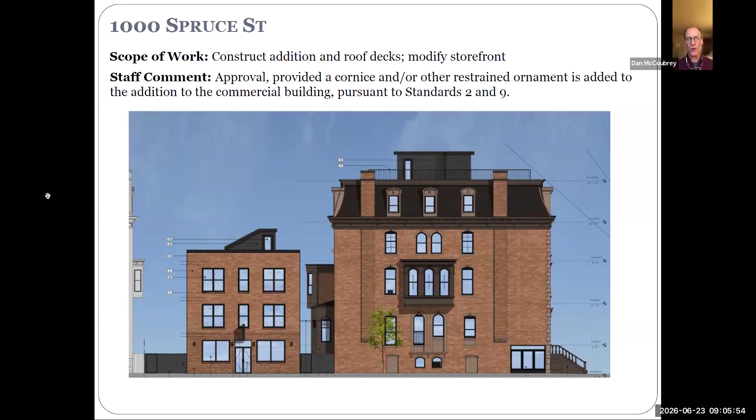So Rustin, I have two comments. The first regards the visibility of the pilot houses. You've shown us diagrams indicating it's presumably not visible from 10th or Spruce Street, but because it's a corner lot, there will be a diagonal view from catty corner from the house. We think it's possible that driving down—I can't remember if 10th Street goes up or down—from further up 10th Street, the pilot house on the existing building would be somewhat visible, the further you got away, of course.

So we've tried to make the railings as open and as minimal as possible. We've set the pilot houses into the center of the building—the configuration of the upper floors means that's really the only place they could go. So we tried to bury them on the property line, as far away from the corner as possible, while still having them function and work.

My other question is regarding the infills on this elevation at the lowest level windows. We see a kind of brown area there. So those are currently that way—they're currently infilled. Oh, I think you're talking about the two to the left, right?

Yeah, that one and the one opposite. And then there's also what looks like an infill of that arch head window—there's an air conditioning unit in that window at the moment. So essentially, we don't have a ground floor tenant yet.

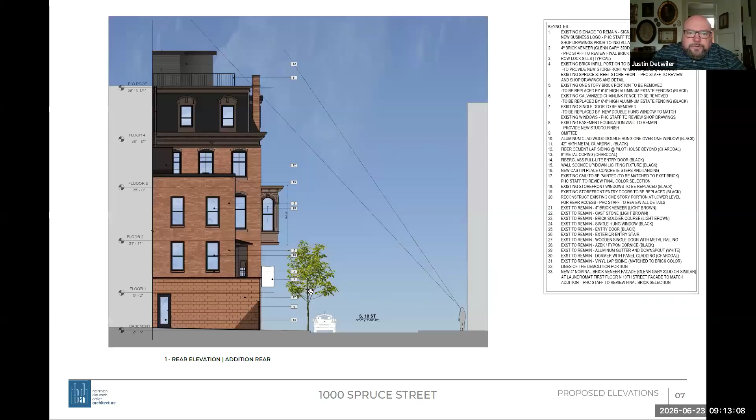Yeah. Rustin, how tall are they? The dimensions in the whole packet are kind of blurry, maybe from the shrinking of the PDF, so I wasn't able to really read the dimensions. We zoned them at 10 feet, but I think they're only drafted at 9 feet, which gives you 8-foot clear inside.

I just want to make sure they're as short as they can be. So it's an 8-foot ceiling inside. I mean, that's a 6'8" door that you're seeing there.

There's a very minimal curb around the top of this existing roof. In order to reduce the height further, instead of a roof deck, you would normally build it on an existing building, you would build a structure over the deck.

Right, instead what we've done is we've made sure that the roof is engineered in such a way that it's pedestal paver, so that's even lower. Even the paver system for the deck is concealed behind that existing low parapet, so that also helped shrink the height of it.

So we've done everything we thought that we could to try and tighten that up, but we can look at the setbacks of the railing further and eliminating that overhang and cornice up there.

Yeah, for me, it's the brown hatch, the perpendicular piece sticking forward towards east. If that could turn 90 degrees, I think it would be less visible. Yeah, we'll see what we can do.

This may be a situation where a little mock-up would be helpful, just to ascertain the visibility. These corners have such long views. Yeah, this is why we're struggling over this as much as we are.

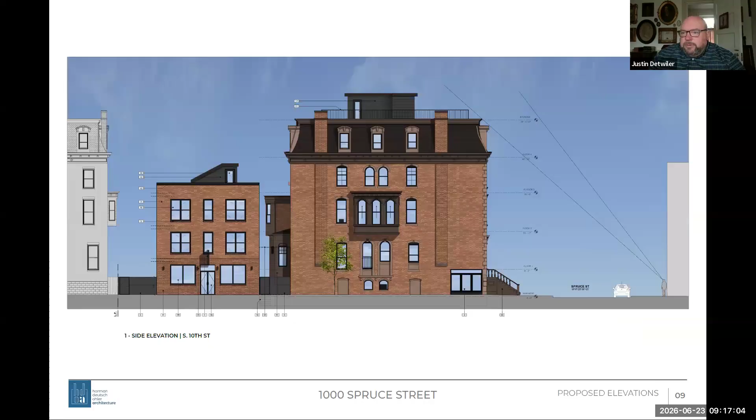Yeah, it's tough because you're working off of the existing footprint. Correct, I wish this thing was slid a few feet to the south, but I get where you're coming from. I do think setting those upper 2 floors back helps bring more light into the rear of that building, which is a good thing for those units.

Yeah, we had met with staff on that before we started designing the addition, about whether it made sense and where and how to shift that addition. So that's why we proposed to set that back. It allowed more of the rear of the original building to be seen. I appreciate that because I think it helps. It helps.

All right, do we have other comments from committee members? Is there public comment? No hands are raised. All right, then we're ready for a motion.

Why am I always the one who's doing it? Nobody wanted to go first, John. Sorry, all right.

I'll tell you, the roof deck is what's giving me pause. I don't like it. I understand the reasons, but I don't like it. I will make a motion.

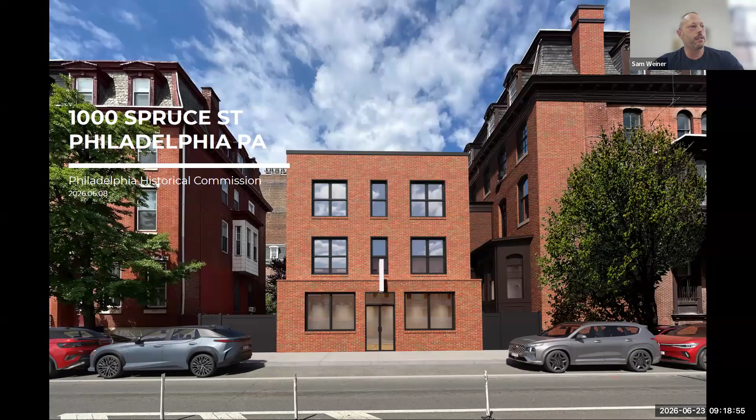Sam wants to volunteer, John. This will be my first motion, Rustin, so bear with me if I don't get the language correct. I make a motion for approval, provided a cornice or other restrained ornament is added to the addition to the commercial building, pursuant to standards 2 and 9.

I would second that motion, but what I'm struggling with is adding language about mocking up and studying the pilot houses and their reconfiguration. We'd be happy to work with staff on that if you want to try and include it somehow.

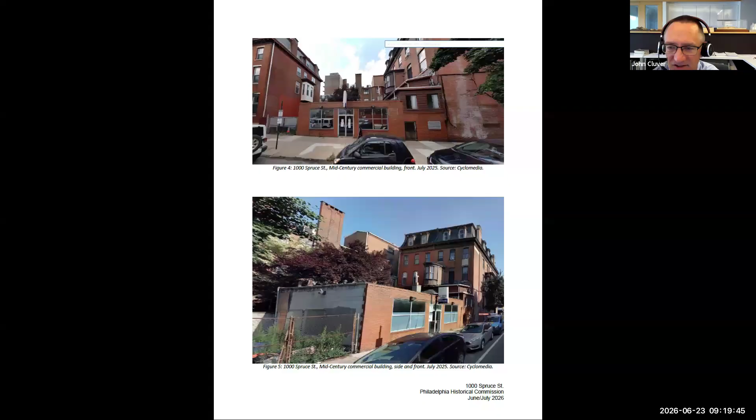I'm sorry, we're reopening the conversation, but with these roof decks, it's not just pilot houses. You've got guardrails and visibility requirements for guardrails, but there's always stuff that ends up on these roof decks. That's not something in our purview to control if somebody wants to put something on their roof deck. Correct, but that's also why we set limits on roof decks and their visibility, and why there are roof guidelines that say keep it to the back half of the main block and things like that.

I think this is a case where mock-ups will be very helpful, along with reduction of elements, the cornice of the pilot house, and potentially its configuration. I think we need to include those items in the motion.

So does somebody want to add to Sam's motion? Don't we have to see if Sam accepts the proposed modifications to his motion? I don't think we have the modifications stated yet. Well, then I guess the question is, Sam, do you withdraw your motion?

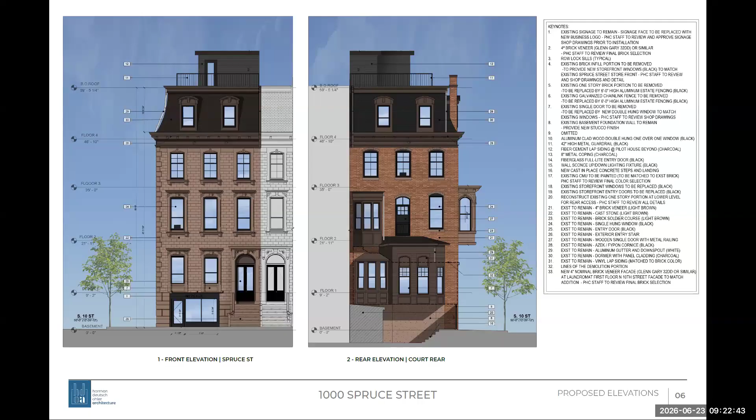Second that. All right, well, let's have a roll call.

John, do you want me to do that? I can do that, Dan. I'm sorry, for some reason my window reduced when I tried to open it.

Committee member Lukacs, Aye. Committee member Stein, Aye. Committee member Cluver, Nay. Committee member Detwiler, Aye. Committee member Weiner... Sam, you're muted. Aye, sorry Dan. It's okay. Committee member Gutterman, Aye. And Chair McCoubrey, Aye. So the vote is 6-1 in favor of the motion.

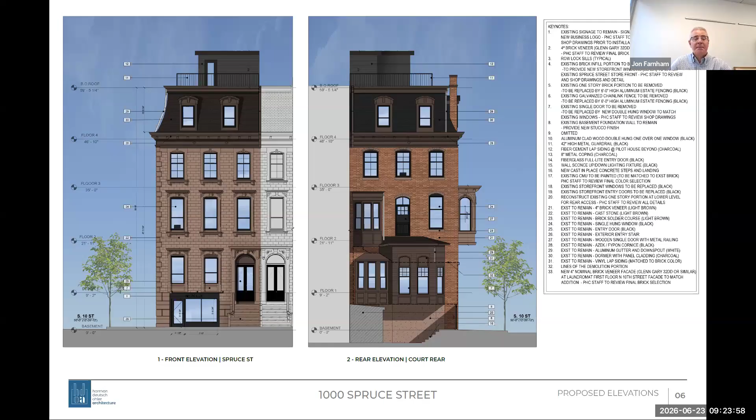Thank you very much. All right, thank you, Rustin. We have one minute before the next item. One of those long minutes.

All right, it's 9:25, so we'll move to the next item on the agenda, 1800 Tasker Street. Good morning, this is Heather Hendrickson with the staff. If we could please elevate Dane Jensen for this application, who is the owner, and also Andrew Cole from Trotter Cole Advisory. I'll read a brief overview of the project.

The structure at 1800 Tasker Street is a historic church building currently being converted for commercial use. As part of this adaptive reuse project, the property owner proposes to install a hand-painted mural on the west facade of the building. The mural is intended to reflect the character of the surrounding neighborhood and to respond to requests from adjacent residents who face the mural wall and have expressed a desire for vibrant, community-oriented artwork at this location.

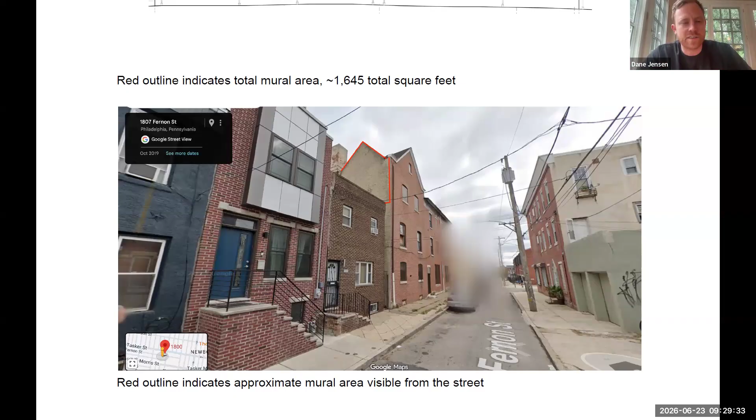That section is also one where, if you say you're okay with this but don't want it visible from the street at all, we could remove it. The version of the elevation that has the purple on it has a breakdown of where that seam could be.

The purple on this elevation is what is new build on top of the old build—this is the equipment pads and the extension necessary to make the elevator work, and again all of this is already permitted. We could do all of the red box, or if you come back and say you're really not okay with this at all, I can share that with the community. But we're hoping we could get some kind of beautification of this rear wall and an opportunity for some public art.

Dane, I have a question about the materiality—is this all stucco, or is the mural going over any brick areas? I couldn't quite tell from the photos that were submitted.

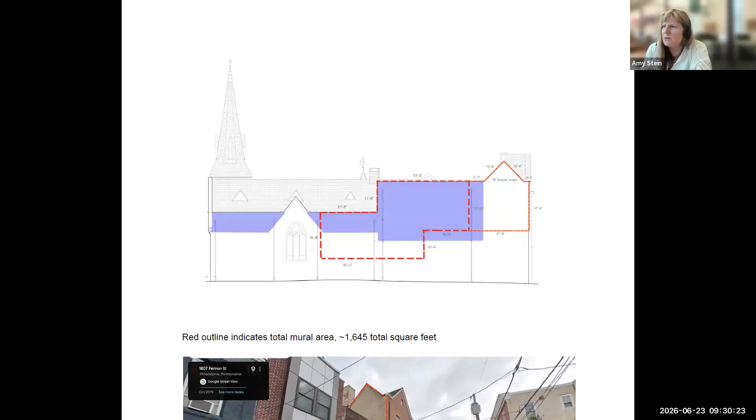The rear of the building is all currently that kind of heavy daubed stucco, and it's not in very good shape—cottage finish stucco basically, the thickest, with big curds. Because we're over-framing, the solution has been, partially where this old window was, to replace it with a plaster that is good for the underlying brick but will seamlessly be a finish for the whole back of the building. But it is currently stucco, yeah.

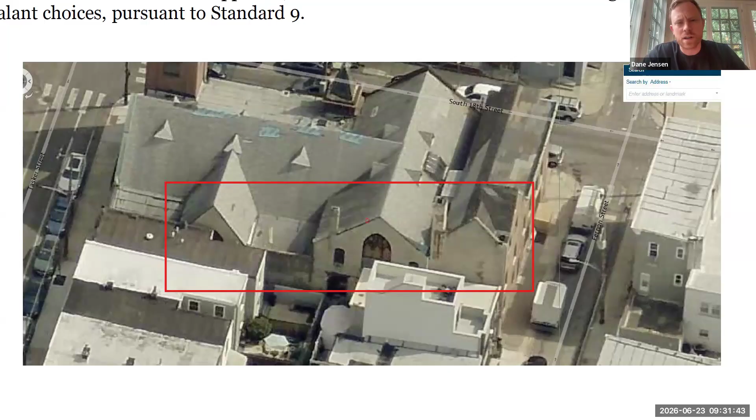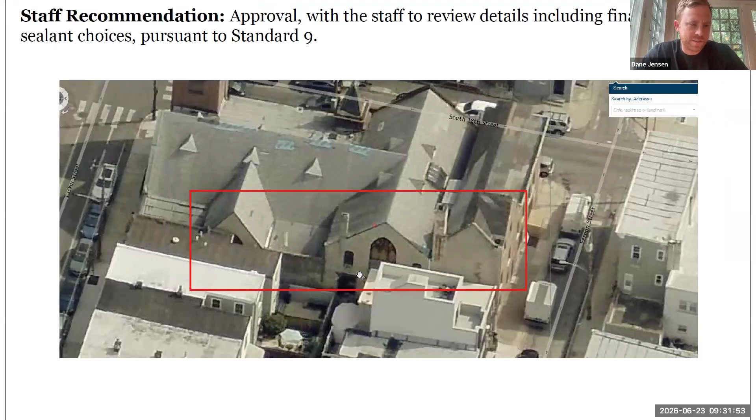We are going to be restoring many of the other stained glass windows in the building. Can you guys see my cursor? My guess is no, I don't think we can. The staff will. The 2 large windows in the main chapel, the left side of this box is kind of over the dormer, that is that window.

All the ones you can see here are being restored. The ones along 18th Street are all being restored, with the exception of one large one on 18th Street that is also missing all glass. So we're going to be restoring the woodwork of it and maintaining that, but it will be clear glass because there's no glass remaining. There are also 2 windows flanking the bottom of that space that will be restored.

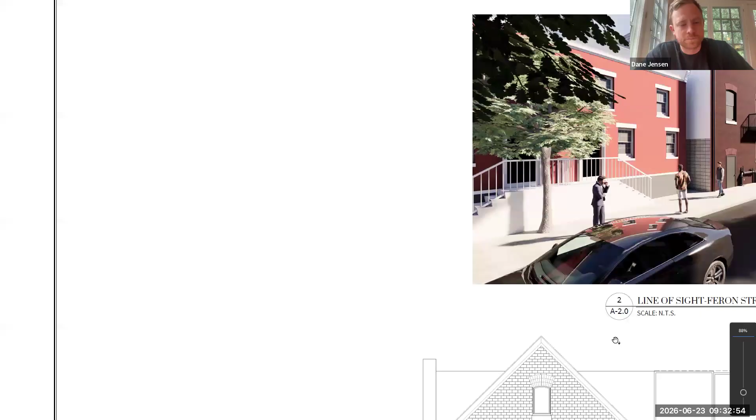There are some double hung windows in the added mezzanine that you can see a sliver of here on the left, that we're restoring. We're actually getting new double hung windows with the weight and chain, and have figured out a way to have that not only have the visual look of what was there, but also the feel.

But the ones along the back, we're missing the glass, and yeah, you can see them there. The ones along the back are missing the glass, and then we're needing to put an elevator somewhere to meet ADA criteria.

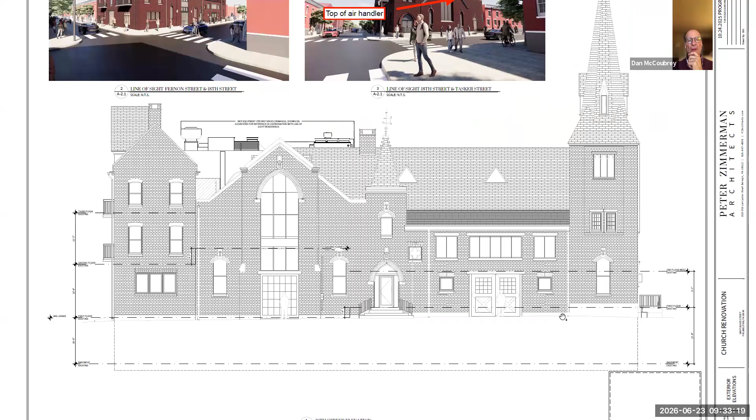It was the sacrificial lamb. Understood. So can we go back to the purple and red diagram? So the window that we see, that's the window that's gone. No, the window you can see to the left here, that one's being restored. I see, the one that's gone in this image is gone. Gone, I got you, okay.

And to be fair, that's all already permitted, right? Yeah, all of that is already permitted. And the one that's gone, there wasn't any glass to restore, and so we're going to use the colors to match the other windows as much as possible. There are bits and bobs.

So what we're seeing in purple is, as you said, a vertical overbuild above the existing wall. Correct. And it's going to be stuccoed. All right.

I will say that I have been following this project, and I know that you're doing incredible amounts of preservation work here, and I commend you for that. I know that you're basically putting a mural here that is largely not in public view, to make the neighbors feel better, and I think that that's very honorable. And as long as, in my opinion, it is done in such a way that it adheres in the correct way and allows the building to breathe, I have no issue with it.

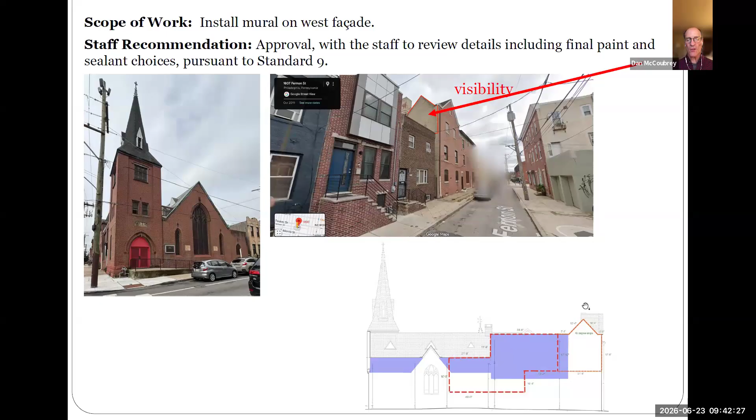Shall we reach out for public comment? Do we have other comments? No comment. Do we need to discuss whether or not we're okay with the entire area?

That was one of the questions - we have two red boxes, the entire area or just the non-public part. So I figured we'd go on record: I'm okay with the entire area.

It looks like the brick doesn't really wrap around, so I didn't see any issues with painting the entire area. Yeah, I think it's fine. I like that it comes out to the street and gives a taste of what hides beneath - that's just for the neighbors.

Is there a public comment? No hands are raised. All right, then let's have a motion.

I'll make a motion of approval with staff to review details, including final paint and sealant choices, pursuant to Standard 9. Second. Then, unless I hear otherwise, we have unanimous consent. Aye, aye, aye.

All right, well, thank you. This is a terrific project.

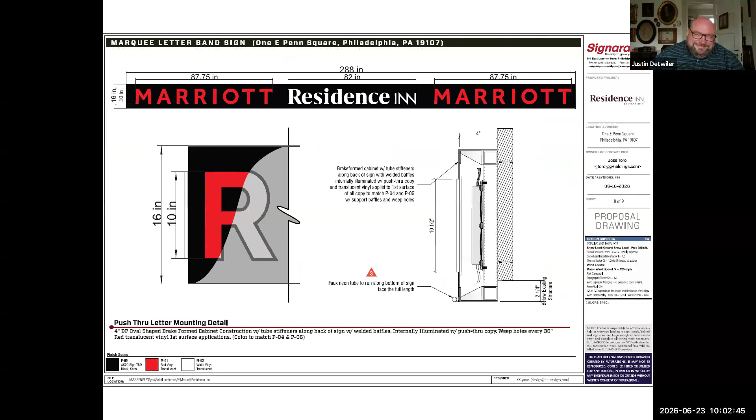Can I just ask one second, Allison? I think Jose Toro is having difficulty, I don't know if he's been elevated as a panelist. Tony, has Jose been elevated? Can he? Just because he may have, I think he wanted to speak.

Hi, can you hear me now? Yes, we can hear you. I apologize, I'm sorry, Ms. Gutterman, I couldn't adjust my screen, and I'm actually also having an issue with my camera, so I do apologize. But I'm here, any questions please?

I just wanted to know if you wanted to add something with regard to the installation of the LED lighting enclosure. We had talked about it being 4.5 inches. I know we'd need something visual. I understand that, Chair, I apologize, it was essentially being a work in progress to nail it down.

Eileen, can I ask that we bring in Bill also? Sure, is he elevated? He's not. He needs to be elevated. Okay, Bill Walther needs to be elevated too, please.

Okay, good morning, good morning. How is everyone? Listening to your comments, I'm trying to get some. I want you to see me as well, not that that's important, but I'm not hiding behind my name. I'm just trying to find where to turn my camera on.

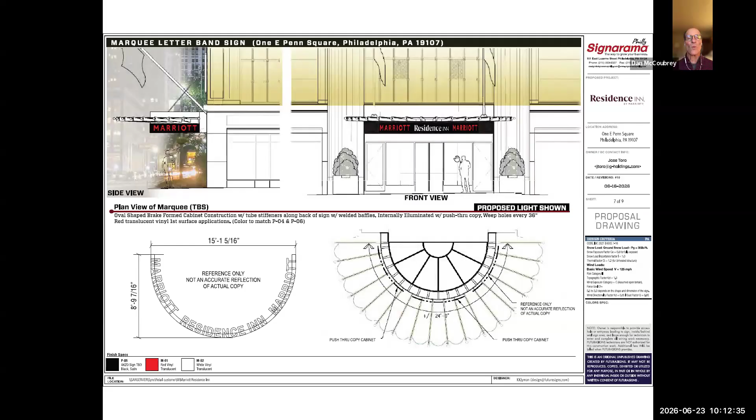And Allison, is the lower level, the sign band — that's the black granite, that whole band — is that an alteration to the building? Are you talking about how it relates to this? I'm moving, not just the marquee, but that whole lower level. I'm just trying to understand whether what's original fabric on the lower level and what's not.

I don't know if it's a historic photo — no, it's not historic, we don't have any historic photos, do we? Dan, are you speaking about right here? I visited this site a couple times since we've been reviewing this application. This part down here I believe is visible granite. Up here, I don't know if it's wood or a composite — it's something that's painted. I don't believe where the signage is right now is any sort of exposed granite. That's helpful in thinking things through in the future.

I can say that in the L&I archive zoning records, there are quite a few permits that were issued for that signage.

Dan, I'm assuming that if we wanted to, we could split this proposition and call out the marquee separately from the banners and the uplighting to get this moving for the client. I would agree. Thank you.

So do we have other comments from committee members? Is there public comment? No hands are raised.

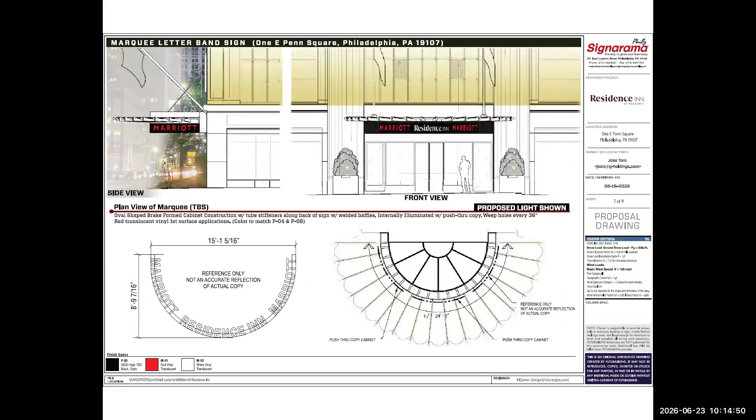All right, then we are ready for a motion. I will attempt a motion to split this application into the marquee, which I am willing to make a recommendation of approval.

And a denial of the portion of the application regarding banners and lighting at the corners, per the staff recommendations pursuant to standards 9 and 10.

And I will second that if you accept the addition of staff reviewing details for the marquee awning. I accept. All right, then, unless I hear otherwise, we have unanimous consent. Aye. Aye. Aye.

Can I just confirm that that would be your recommendation moving forward to the Historical Commission, regardless of us going back and contemplating all of your comments today and seeing what else we could do?

You can always make changes if you'd like, as long as they're presented to the commission within the proper time frame, and the staff can give you advice on that. Okay, thank you. I appreciate that.

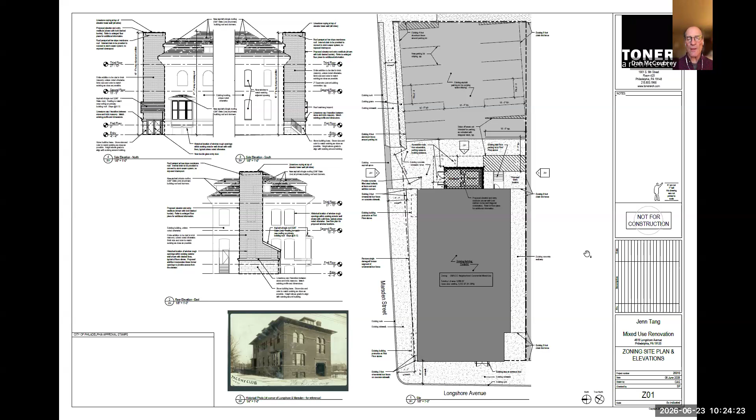Just for reference, what's going to happen to the cornice? It's all been boxed in. Is the plan in the end to uncover and restore it? We have not had that discussion yet, so I actually don't have that answer.

Yes, the owner currently is not planning to do any further renovations to the exterior of the building beyond replacing the windows and the elevator. So as it's been boxed in, that's not within their current budget to restore the cornice or any of the other exterior materials. What about the roof? They will most likely be having to replace the roof since the building is leaking substantially. Yeah, we did show that on our elevations as the roof replacement.

So even though the cornice is going to remain covered, I still think there's some sensitivity to how this relates in location to that cornice, because assuming this is a successful project, there could be a time in the future where the owner or a future owner wants to restore that cornice. I would hate to have that elevator be something added to the challenge, even if it's just thinking through, if there were brackets, how it relates to the brackets and things like that. Well, and if you remove any, do you salvage them and put them in the basement or something?

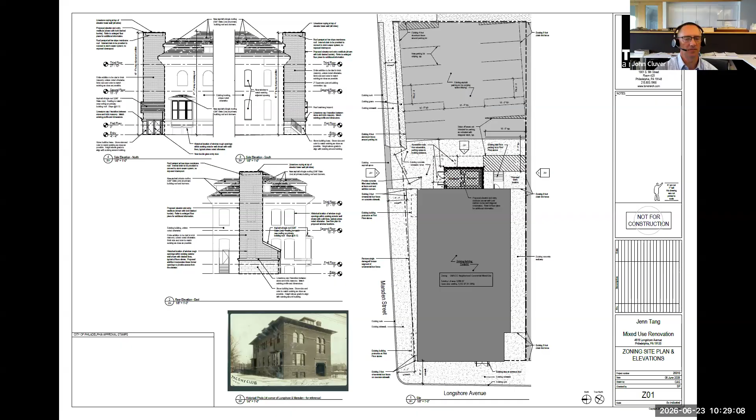So we've been having a lot of conversation about this elevator and how to make it fit the building a little more compatibly. We haven't discussed the initial comment that the elevator doesn't work within the building. Can you talk a little bit about the options you explored and why they don't work?

Sure. The main problem is the overhead clearance of elevators. If you look at that top floor, it's a little deceptive because you have sloped roofs vaulting throughout the whole upper floor, and the floor plate is actually a little below the roof line itself, so it's almost sunken down in a way. So your clearance above leaves only a gap in the middle that would have a 10 foot 8 inch hoistway clearance on that top level, and that would only equate to about 6 to 7 feet total width on the upper floor. So there's really no usable space to get an elevator to the top floor. That was the primary concern.

So it would project through the roof, you mean? Right, exactly, it would pop through the roof. I guess another option could be locating it in such a way that it takes advantage of the dormer, using the dormer as that additional height that is needed, and potentially expanding the dormer a little if you had to. Right.

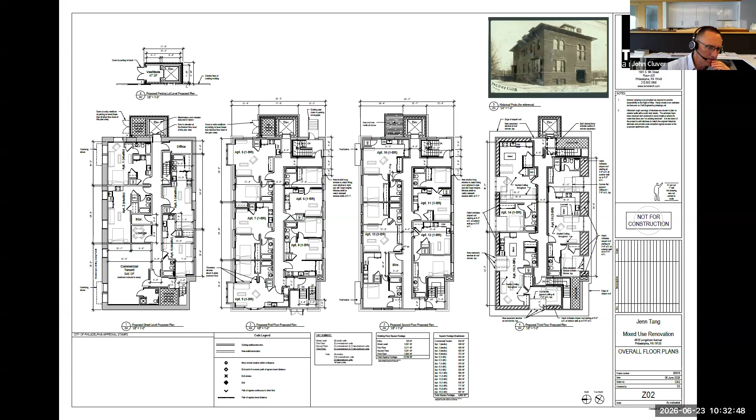I mean, understandably, if it's for the VA, you almost probably should consider that. Doesn't the VA have requirements for the number of ADA units? Because I feel like if you have one ADA unit, you're going to lose a whole entire apartment with the way these are jammed in there.

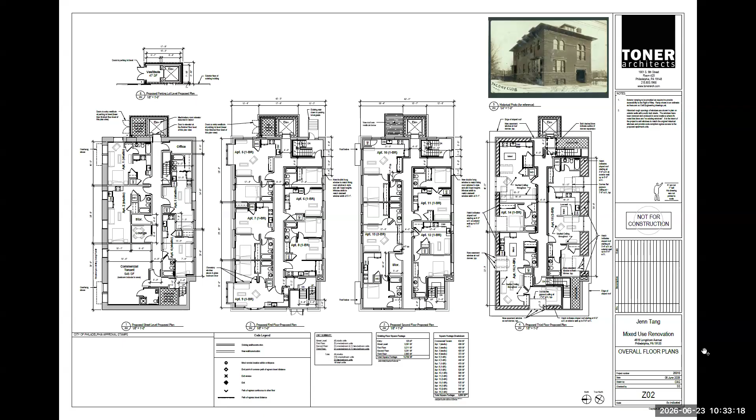So we have been working with the building owner and the requirements that they've been working with the VA. That has not been a requirement relayed to us for this specific property. We are using some of the historic exceptions for ADA, or ANSI Type A units. It's worth noting the units get progressively larger as they go up as well, so some units on the lowest level are really tight, but on the top unit there's lots of extra space. So that can be accommodated.

Other comments from committee members? All right, then. Is there public comment? No hands are raised.

All right, then let's have a motion for this conceptual application. I'm going to make a motion of denial in concept. I feel that it hasn't quite been shown to us that the elevator can't work within the footprint of the building, and that locating it in such a way that perhaps it's a dormer that pokes up through the roof could be an approach.

We have a second. I'll second. Then, unless I hear otherwise, we have unanimous consent. Aye, aye, aye. All right, well, thank you. Thank you very much.

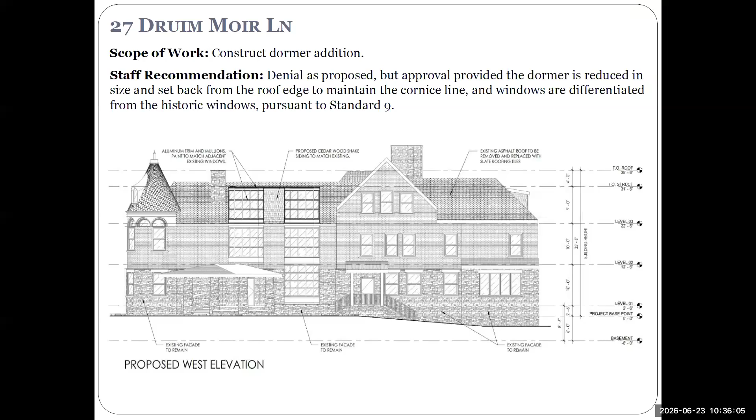This application proposes to construct a dormer addition at the third floor of the mansion at 27 Druim Moir Lane, known as Brinkwood, to accommodate the conversion of attic space into living space on the interior. The proposal includes demolition of a portion of the roof and a small existing dormer. The new dormer would include 2 aluminum-clad window systems whose alignment and configuration would match those on the first and second stories below, with cedar shake siding to match the existing facade. The roof's existing asphalt shingles would be replaced with slate tiles.

In January 2023, the Architectural Committee reviewed a nearly identical proposal for 27 Druim Moir Lane and recommended denial, noting that the proposed dormer was out of proportion with the features of that facade and that the replicated windows would diminish the visual impact of the historic windows. A substantially revised design proposing a shed dormer was approved by the Historical Commission in February 2023. At the following Architectural Committee meeting, a different proposed dormer design was reviewed and denial was recommended there as well. In April 2023, the Historical Commission again approved a revised application proposing a shed dormer.

The staff recommendation is denial as proposed, but approval provided the dormer is reduced in size and set back from the roof edge to maintain the cornice line, and that the windows would be differentiated from the historic windows below, pursuant to Standard 9. Thank you, Josh.

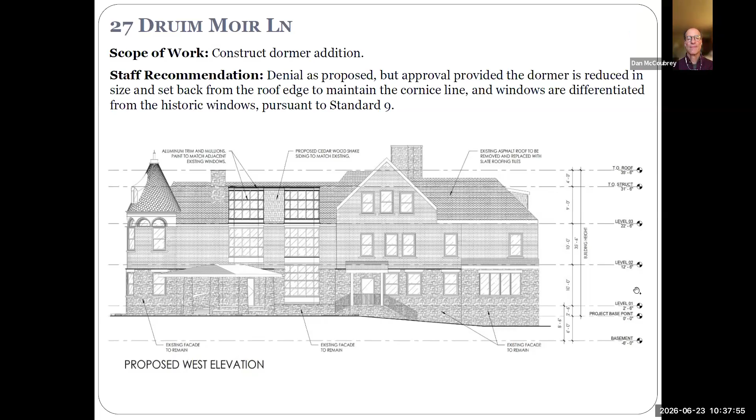Thanks, Josh, appreciate it. Scott Woodruff here of DesignBlendz Architecture. Appreciate that intro. As you said previously, we were here at the Architectural Review Committee and did go through some substantial revisions. The owner, who's also on this call and can talk to this, would like to go forward and request that we revisit this dormer addition. The overall reason and design for this is to extend the existing stair that goes from the first level to the second level with an identical stair that goes from the second level to the third level.

Currently, there is a very small, narrow winder stair that goes to this third level, which is not really adequate to get up there and is a little bit unsafe. So the idea here is to replicate the stair and windows to provide correct headroom to get up to that level, and continue that in character. There are some photos, I think, on the next page, Josh, of what the interior currently looks like at the first level going to the second, to essentially replicate that going up to the third, to access that space.

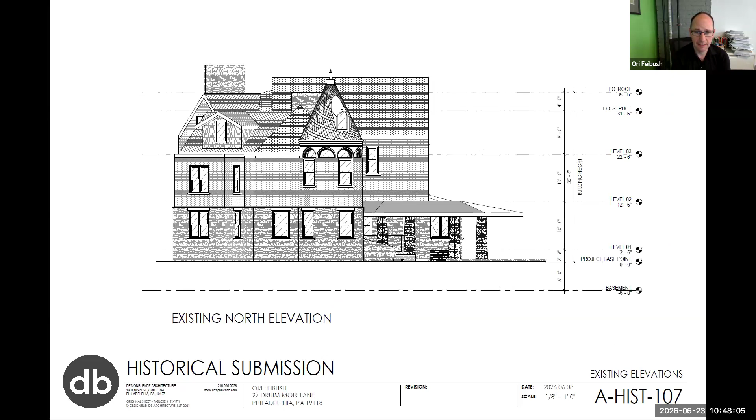So I certainly appreciate your feedback, and I do want to get this right. We've looked at different window styles even. It just, everything feels forced when we try to showcase that this is different than what was there before. Whereas I sort of want this to bring in a lot of light, but ultimately create a rhythm that this was always there, which again, I know is in complete contrast to your standard.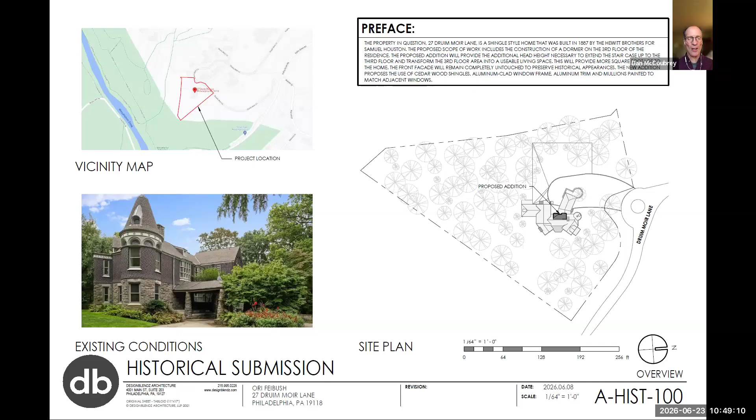Yeah, I think that's the difficulty that I'm personally having, and I know we've had this discussion, I think, on 2 previous occasions, and I guess we, at least from my perspective, have to agree to disagree. I do agree with my colleagues that the cornice line separating the cornice, and having the upper windows appear more dormer-like and pulled back, is more consistent with the architecture of the house as it exists.

So I know I'm going to get pushback on this comment, but I'm doing a very long, tedious restoration on the corner of 24th and Delancey that backs up to Fitler Square.

The top floor of that home is the only one on the block that has a quote-unquote ballroom, added in the 1920s, with a window very similar to what Mr. Feibush is proposing. It's not dissimilar in terms of context and massing, and I just wonder if a modern interpretation of what's here wouldn't work best for this home.

If you look at the existing conditions photo, it's not like a protruding bay. The way the drawings read, it's as if it's a bay on a new building in South Philly or something, but it's not that thing. So I wouldn't have a problem with the massing, especially on the back of the house. The only thing I'd question is the materiality between the two banks of windows on the third floor.

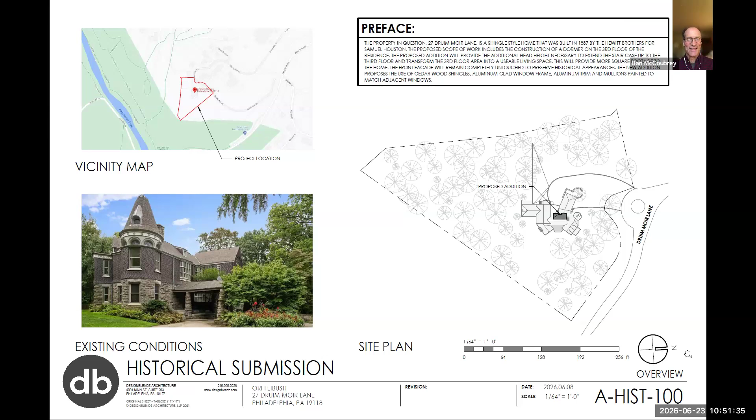I have great hesitation because this is an individually designated property by the Hewitt brothers, arguably one of the greatest 19th century architects and residential architects in Philadelphia, for the Houston family who built this entire neighborhood. This was Sam Houston's house, who was head of the Houston estate. I'm actually writing a book about all this right now, so that's unfortunate timing for this argument. It was also a brothel for about 15 years, but Druim Moir, this house, Stonehurst, Krisheim were all designed with two main facades, front and rear. The rear facing the park was the family facade, done so the rear was just as prominent as the front.

I think the ability for this house to maintain its integrity—we have to uphold the Secretary of the Interior standards here. You could still create a staircase that does what you want, that is not unsafe, that is quite wonderful and generous, but pulling that dormer back doesn't take anything away. You can still have plenty of light; it's just not the aesthetic facade treatment you're hoping for. So, as Dan said, we can agree to disagree, but I wanted to state that for the record.

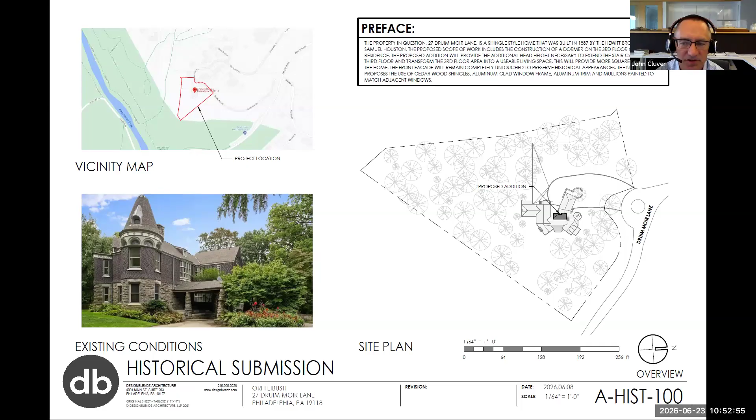If I can add to your comment about the generous stair—I think part of what's driving this is the desire to match the width of that stair going from the second to the third floor. History is littered with examples of a grand stair from the first to second floor that takes on a diminished footprint going to the upper floor. If you think about the scale of that third floor and the way it's tucked under the eaves, there's a disconnect with having a 5-foot wide stair continue up, with an extra 2 feet of free space in front of it. I think you could still have a very grand stair going all the way to the third floor while meeting everyone's comments here.

No, I appreciate that. One other piece here, which is purely aesthetic. Many of you know me as a developer in Philadelphia. What probably none of you know is that I'm the largest collector of early American lighting in the world. I have truly magnificent Bradley and Hubbard and Tucker lighting, all out of Meriden, Connecticut, that requires enormous flow, breadth and height to display.

This home was originally gas, not whale oil, but very much in keeping with the era. When I suggest we're doing a full renovation inside and out, it's to return to original historic lighting—some of which, purely aesthetic here on the facade, really requires that space and breadth to display a collection of lighting that doesn't exist anywhere else other than in my personal collection. It's something profoundly unique.

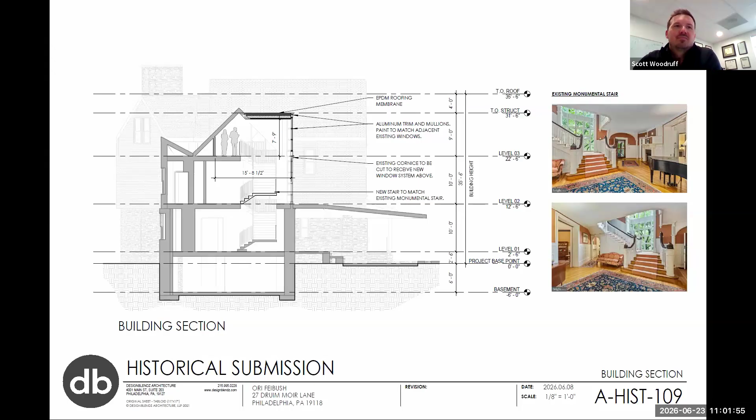All right, next item on the agenda is 1523 to 29 Wallace Street.

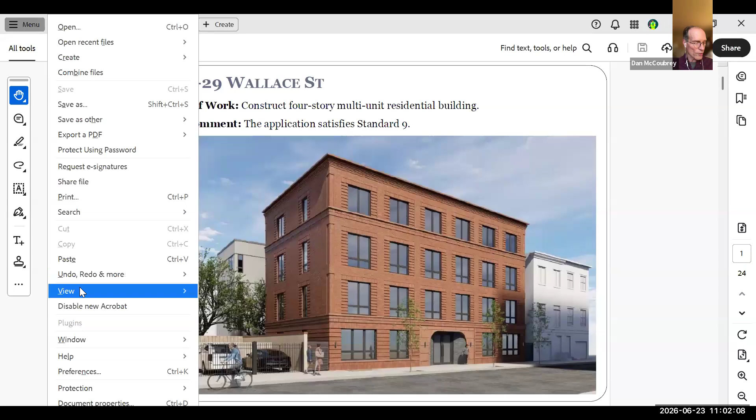Good morning, committee members. This is Kim Chantry with the staff. Tony, if we could please elevate Derek Spencer as the applicant for this project, and I'll read a brief overview. This application proposes to construct a 4-story multi-unit residential structure on the surface parking lots at 1523 to 29 Wallace Street. It appears that the buildings that once stood on the lot were demolished around 1966. The site consisted of several vacant lots at the time of the Spring Garden Historic District designation, with a non-historic site wall. Therefore, the Historical Commission's jurisdiction over the undeveloped site is review and comment only. This means the Historical Commission and its Advisory Architectural Committee may offer non-binding comments on the application at public meetings, but may not approve or deny it. The staff comment is that the application satisfies Standard 9.

Thank you, Kim. Good morning, members of the committee. Thanks for having me this morning. As Kim mentioned, I'm Derek Spencer, owner of Gnome Architects here in the city. I've been before you many times before, but happy to present 1523 Wallace Street. This is a 27-unit, 4-story building in the Spring Garden neighborhood.

We really wanted to match the aesthetic of the neighborhood with a red brick building. Throughout the presentation, you can see multiple examples of how we've explored the different types of buildings that are around us.

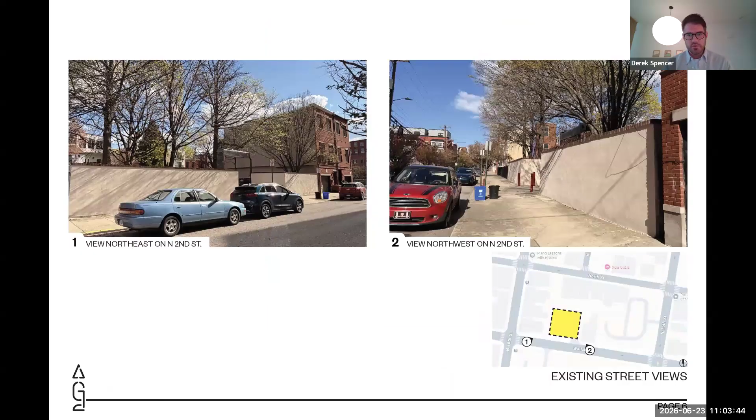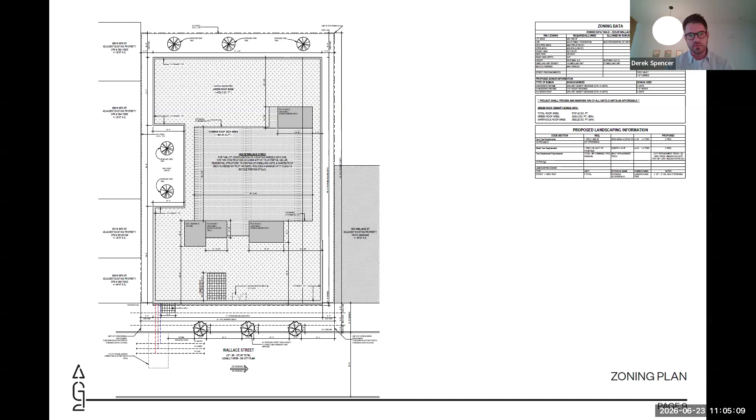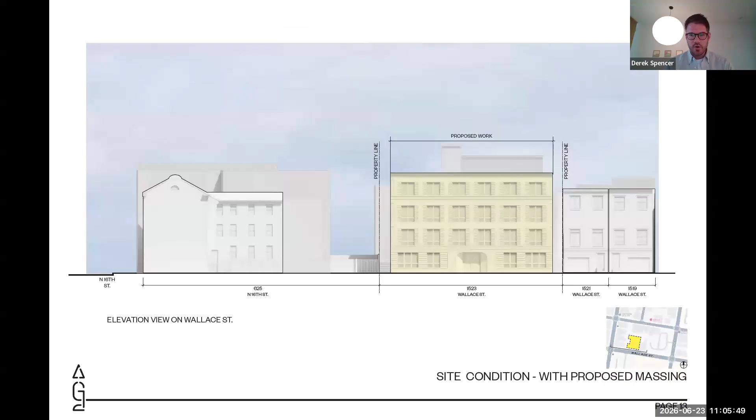All good. Here's the elevation on the streetscape so you can get a sense of the massing. The front facade of the building is red brick, red cast stone with an archway around the front entry, double doors. We have some black accent brick on either side of the doors flanking it, and a brick cornice both at the second and fourth floor to split the building up into a 1-2-1 pattern.

This is the west side of the building. Like I said, it's a little bit more visible from the street. So we have red brick extending back to the court.

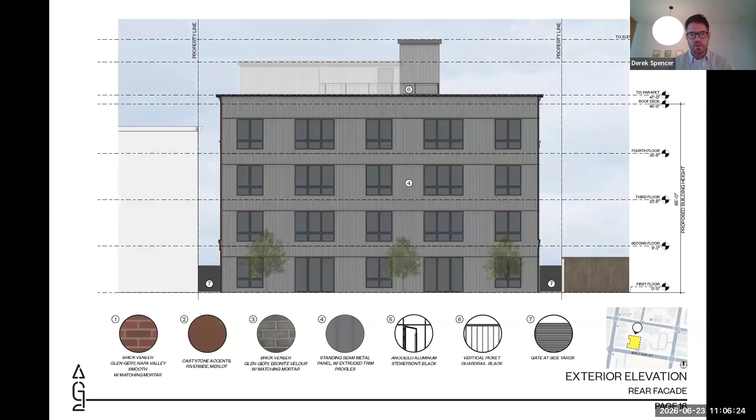Vertical metal panel siding around the rest of the sides back, and then on the east side, you can see about 10 to 12 foot extension of the brick back on that side.

These are just the 2 court elevations showing that vertical metal panel. And here's our building section showing the pilot houses, both 20 feet from the rear and 24 feet from the front. This is some diagramming of the existing buildings on the left around the site, both with the shutters and some architectural embellishment around the entryway.

We tried to bring that in with some horizontal brick banding on either side of the windows to differentiate the windows, as well as the cast stone archway around the front door.

Here's a rendering of the building, again showing the red brick. You can see how it extends down to the court on the west side. We have a brick corbelled cornice at the very top of the building, as well as intermediate cornices at the 4th and the 2nd floor.

It's just a straight-on view, and then another view facing northeast. And that's all we have. Thank you very much. All right.

So, I think that the use of the brick, the tripartite division, the use of punched openings, all do a nice job of helping this fit within the neighborhood in the context of the district. I would quibble with some of the historic language diagrams you've done there. I don't agree, I'm not on the same page with some of that, but I think details notwithstanding, on the whole, it's working within the character of that district.

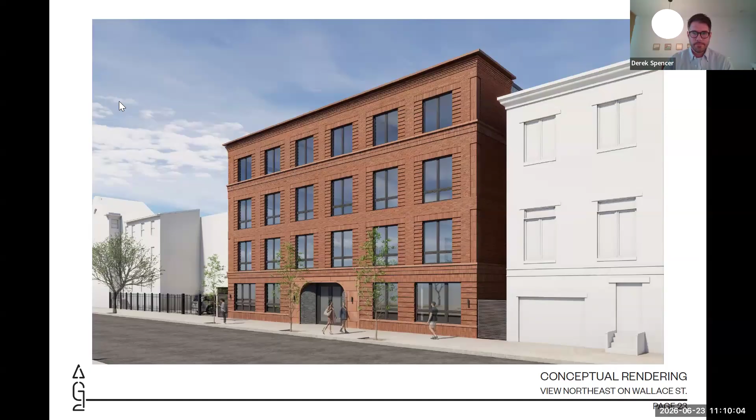The one, speaking of the brick wrapping, there was the one facade, the courtyard elevation. That one, the brick returns just a little, it could go a little further, but I'm not going to push it. But again, if you feel the need to increase that, it would be welcome.

I wanted to give you a little bit more than the 4-inch side of the brick. No problem, thank you. That's pretty deep inside the site, I guess, isn't it? Yeah, no, I know. Just, I know.

I agree with my colleagues. Thank you for the nice materials and attention to details. And I guess my only small comment would be the opening looks a little short or small relative to the size of the other windows. And I'm not sure what to do about that.

Yeah, we were actually playing around with pulling up that red cast stone around the door to maybe the sills of the windows above. It was getting a little close. But if you look at a lot of the historic imagery from the buildings around us, a lot of them do have that entryway taller than the windows that it flanks. So I do want to work on that a little bit before we get to the commission.

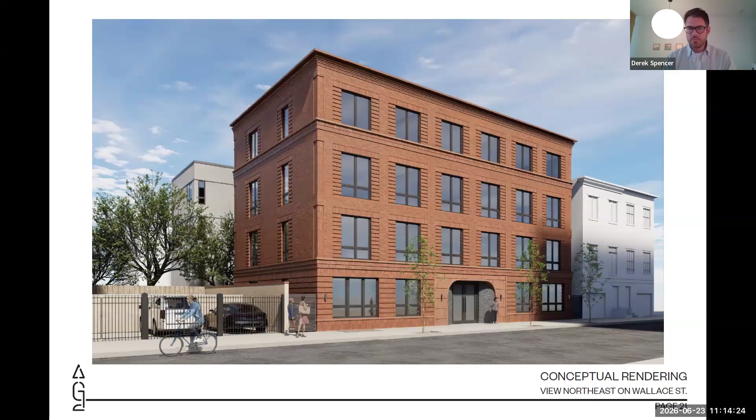I have one little comment. I think on your plan, I'm not sure the plan shows the recess at the entrance. It probably does not at this point in time. That was a development as we were kind of going through the exterior design. Good development. We do have plenty of room in the lobby for that, so we'll make sure that's updated before the commission. Good. All right, other comments from committee members?

Well, I just wanted to say thank you that this really exemplifies an urban infill that's appropriate for the Philadelphia context in this neighborhood. You know, the fact that it doesn't have parking, that it's limited to 4 stories, that its materials are fitting of this context is great. So thank you to the whole team for proposing this. Thank you very much. We really appreciate that. And your client for making the investment. Really. Yeah, absolutely.

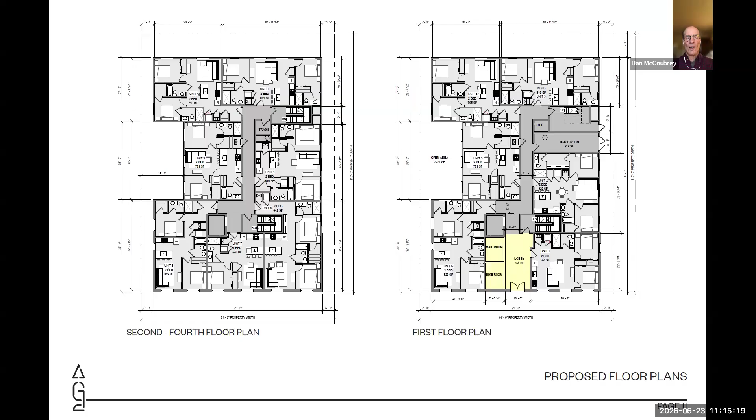All right, other comments? Is there public comment? Yes, one hand is raised currently. A. Biggin. Yes, can you hear me? Yes, we can. Okay, good.

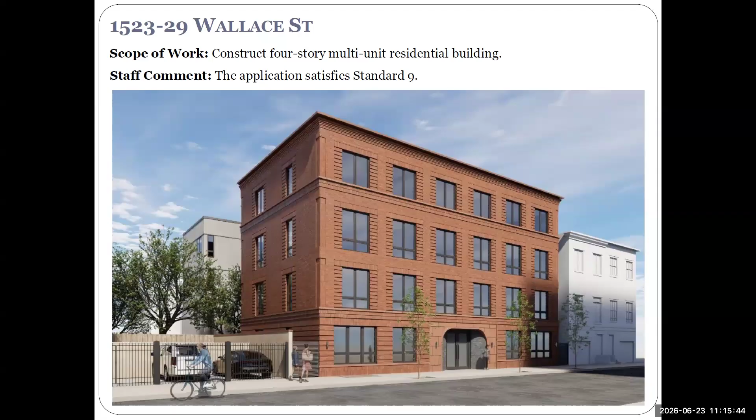I'm an adjoining neighbor, and I want to just make a few comments. I'm aware of the limitations of the Historical Commission here in approving this. I don't mind the look of the building overall, that's fine. I'm very concerned, however, about the density. The developer is making use of bonuses for the green roof and for affordable housing units, which maybe exist, or maybe they just buy into them, that allow them to go above 38 feet and have 27 units instead of 19. It's going to end up with 50 plus bedrooms in this building, so there could easily be 75 or more people living in there. I'm concerned about the lack of parking, concerned about the lack of bike parking, concerned about trash management, just the overall density of it in what is largely a single family and up to 6-unit residential neighborhood right now. It's kind of inappropriate. So I just wanted to make these comments at this point.

All right, well, I think the site context, the commercial references are somewhat misleading. There's nothing really in the neighborhood except if you go out to Broad Street outside of the Franklin Learning Center, which the architect mentioned. I wish this could be a smaller building and more in keeping with the historical nature of the neighborhood. Thank you. Oh, thank you for comment.

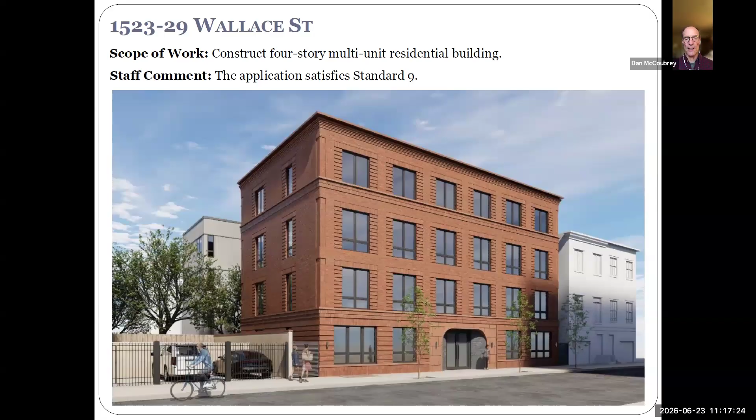All right, then this is simply review and comment, so no motion or vote is needed. All right. Thank you very much, everyone. All right, we thank you.

All right, now the final item on today's agenda is 3500 South Broad Street. Good morning, everyone. This is Alex Till with the staff. I will be reading a brief overview for this project. First, could we elevate a few people to panelist for this? The applicant, architect Brittany Scherer, is in the meeting, and I believe I also see the American Swedish Historical Museum logged in as well.

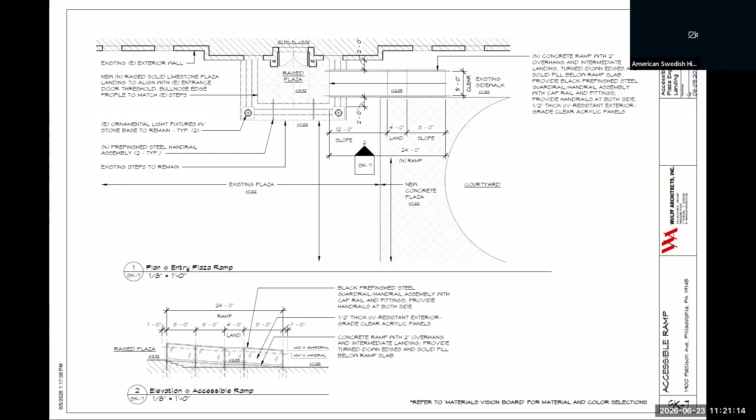Therefore, we're proposing a parking lot on Pattison Avenue and adding accessible entrances on both sides of the building. On the other side, which is currently our front side, the accessible entrance portion is a ramp that will connect the front door of the museum to the museum's terrace, which is heavily used for outdoor programming. We're also requesting the building of an ancillary outdoor building to support that programming with all of the supplies that we use on the terrace, which currently have to be stored in the basement and brought out to use.

Thank you. Thank you.

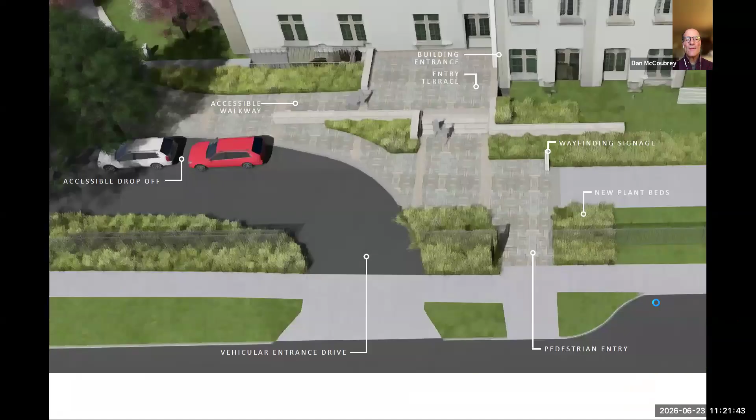Can you talk about the location of the auxiliary building and why that was chosen there? It feels particularly close to the museum. Are there other locations that might give it a little bit more breathing room?

I can start with the answer, and Brittany, if you want to chime in. The main purpose is to store large and heavy things like tables and chairs that are used on the terrace, so it's actually really important that it be close. The other thing that's hard to tell from the plans is the topography of the site. We are at the top of a built hill, and therefore there's a lot of incline if you get further from the building or closer to the park part of the building.

We also did a lot of analysis of view sheds and how people approaching the building will perceive this structure. When you're approaching on Pattison Avenue, the further you bring it from the building, the more it blocks the architectural arcade that's so important to the visual look of the building when you're approaching by car, especially, which is how most people arrive. Those would be helpful to see because that strikes me as counterintuitive, but I also don't have the visuals in front of me to understand it.

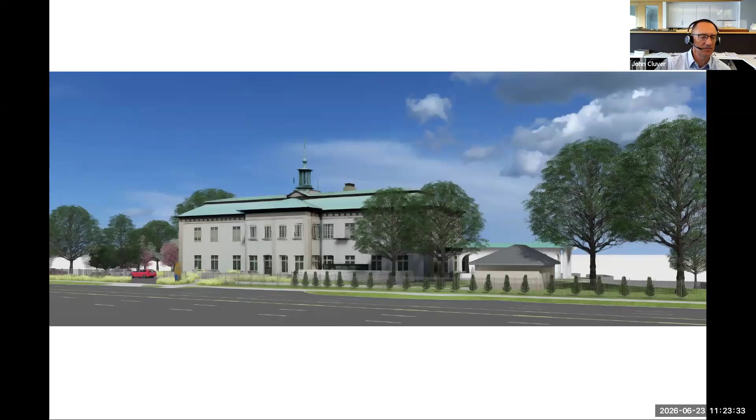I'm sorry, go ahead, Amy. I had a related question—I thought the same thing about the auxiliary building. This building doesn't really have a back side, if you will; the front is the back, the back's the front. What's the best place to locate equipment, whether that be an auxiliary building, future chillers and MEP equipment, whatever they are? Sort of tucked on that same side is a future MEP equipment enclosure with a solid fence, and it's tight up against the building.

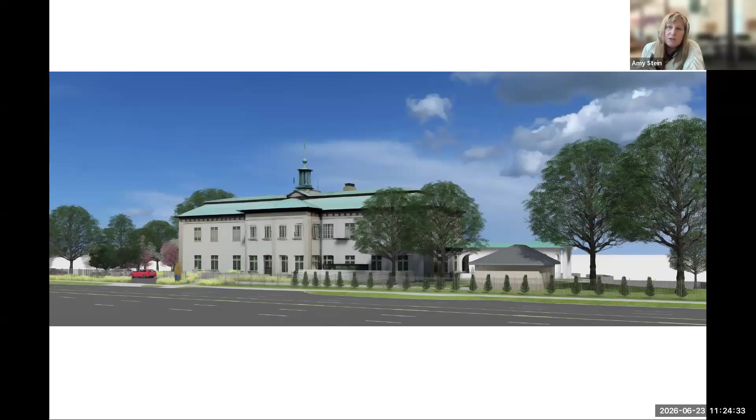I'm wondering, is there a place on your property where the auxiliary building and equipment could be set apart from this wonderful piece of architecture and screened in some way that could still function and work well? It's just that when you tuck things so close to the building, it detracts from that original design we all cherish as a community. Is there another location where we can get some distance from this really unique arcade and loggia element?

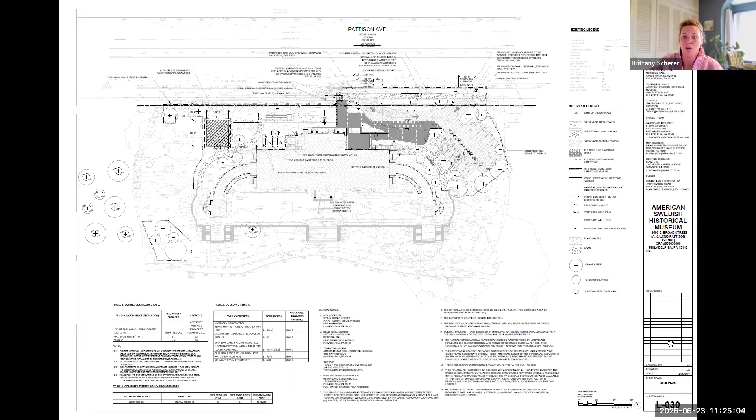I can jump in to answer. That's a thoughtful question, one we asked ourselves early on too. As Tracy mentioned, we did quite a few studies looking at different locations. The MEP equipment listed on the drawing is future space held for air handlers to bring everything up to standards for the museum. There is currently quite a bit of existing MEP equipment there that's been there a while.

Our intent is to screen what's there now and leave space for future MEP equipment. There's quite a bit of elevational change from the Pattison Avenue side to the park side, so in our studies, anytime we moved equipment to the east or west sides, it put it on a landscape pedestal that was very clearly visible from the interior park side. Our rationale for tucking both the MEP equipment and auxiliary building close to the building is that it makes it feel like one component and doesn't put these service elements on display. It's hard to tell from the plans, but it's a very prominent hill the museum sits on, so anything on the east and west is clearly visible from both Pattison Avenue and the park side.

Are there heritage trees you're considering? There are heritage trees as well. The tree directly to the left of the auxiliary building in this plan is a heritage oak we've worked hard to avoid and preserve. We are proposing some tree removals for the plaza and parking lot, but it was very important to us and to zoning to maintain as many trees as possible, particularly the heritage trees. So we're navigating views, grade change, programming requirements of the museum, and tree preservation—quite a few factors we juggled and studied in our iterations. We feel strongly this is the best approach to balance all those components.

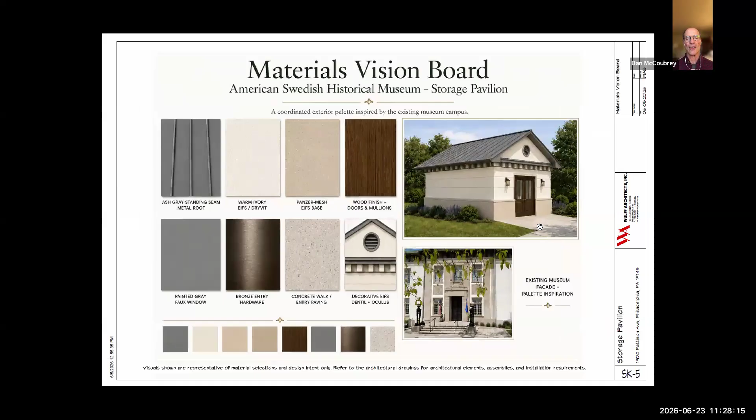One suggestion for the auxiliary building is that if it was entirely a hipped roof rather than having a gable end, it might be less visible. I'm concerned about viewing it through the arcade, but if it was just a roof that hunkered down all the way around, it might be somewhat less prominent.

Yeah, I agree, Dan. You took the words out of my mouth. I appreciate what you did to make this a lovely little structure, but I think in some ways it catches your eye too much. I want it to be simple. As a pedestrian who may or may not know the site, it almost looks like a little visitor center or bathroom building, and I want it to disappear a little more. So I think hipping the roof on all four sides—and I appreciate that you're making it look like there are windows in the doors, but there aren't. If they were just solid brown and the roof hipped, it would still look attractive relative to the existing building, but it would help it recede a little more.

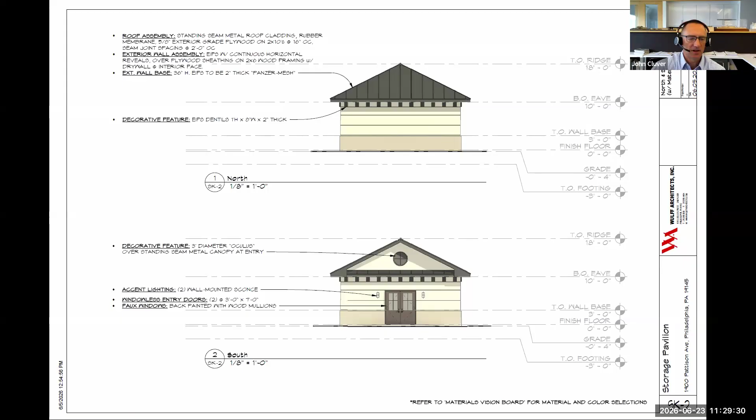I'm still hung up on the siting a little bit. I can appreciate that you did studies, and maybe if we were to see them, we would see what you were seeing. Just looking at this topographical plan we were looking at a minute ago, it feels like there's a little bit of a plateau where it's situated, so maybe moving it a little to the left, or even rotating it more perpendicular to the curve of the walkway might offer something. You talked about being able to see it from Pattison Avenue, but I just feel like it's hitting on a broad side and blocking the view of the museum itself. So maybe for the full commission, have some of those studies added to this packet for consideration or discussion.

I think the two views we were really thinking about—I forgot to mention the other one—was cars on Pattison Avenue, since that's the primary audience there; we have very few walkers going by. But then the view through from the museum's terrace and through the arcade was the other thing we were really considering, because that's the pedestrian view, seen by thousands and thousands of people. So we do have studies on that, and I'm sure we can include them in the next iteration. Thank you.

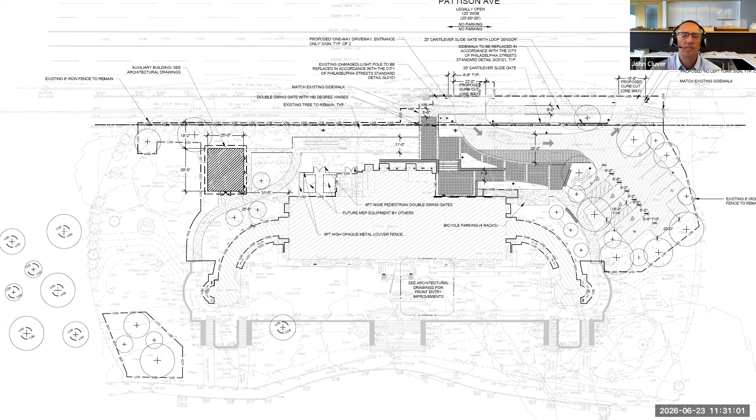I had a question about the fence along Pattison Avenue. And then I guess it mentions gates at the ingress and egress drives—is there a plan about how those gates actually function?

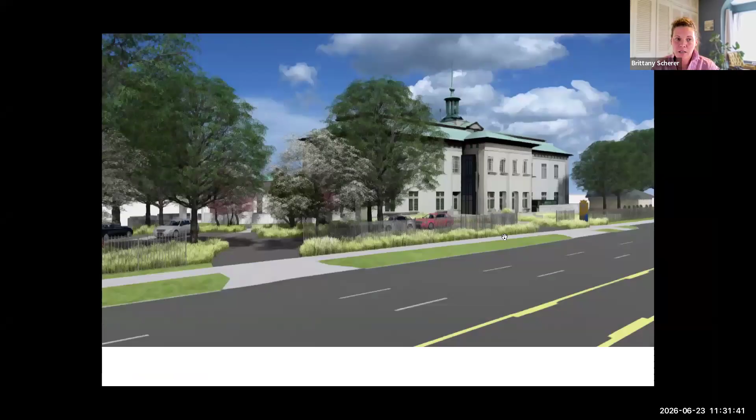I can help answer that one. That's a great question. There's currently an existing fence all the way around the demarcation line, as Tracy mentioned. It's not a traditionally historic fence—it was installed in the 1990s, but we consider it part of the museum's vernacular. So the intent is for the new gates and any replacement fencing to match that same fence to remain. Additionally, there will be repairs and repainting of the fence along the Pattison Avenue frontage, so that entire frontage, when complete, will look uniform and of the same style. In terms of function, there will be 2 pedestrian swing gates at the dedicated pedestrian entry, and the vehicular gates will have cantilever slide gates that will be controlled. Access will be controlled by the museum, so those gates will be open when the museum's open and closed when the museum is closed.

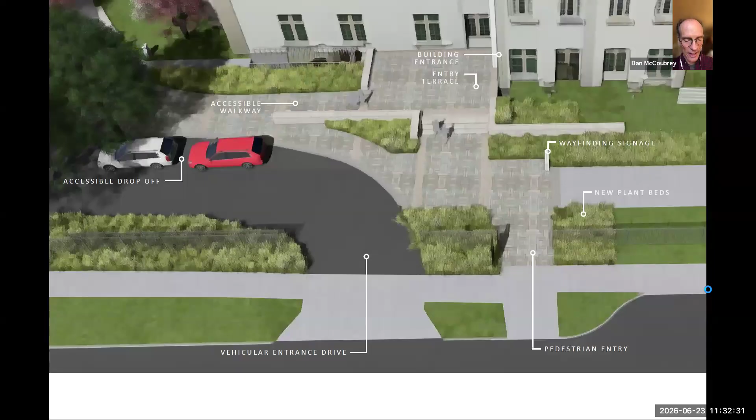Thank you for that explanation. The other question I had is about the acrylic panels on the side of the ramp, and I'm wondering whether that's really necessary given the level change—whether you even need it, since it's just a little bit over a 2-foot change.

Yep, so you're not really required to have guards there. And acrylic scratches—it could be a simple railing instead.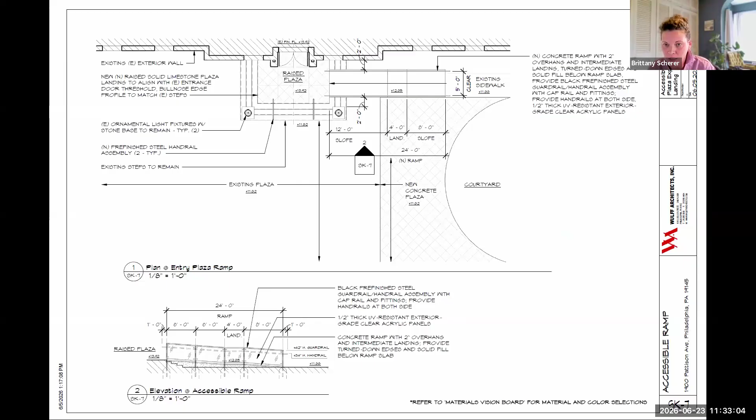I was just looking to see our architect, Al Wulff. I'm not seeing him elevated—I'm not sure if there's a chance to elevate him now, but in the meantime, I'll chime in quickly as the landscape architect for the project. We did talk quite a bit about that grade change, and while we feel it's right on the edge of what's required for a guard, given the clientele for the museum—visitors with strollers and things like that—we thought it would be prudent to provide protection. But it looks like Al was just elevated, so Al, I'll let you chime in a little more.

Brittany, you hit it on the nose—that's really what we were trying to do, provide additional protection. Right now there are 2 railings as you approach the main door; you can see them in the plan. Those are black metal railings, and because of the drop-off on the side of the ramp, we know that officially you probably don't need those railings as drawn, but we felt it would give an extra level of protection. If you drop it down to a 36-inch handrail, it can double as both.

And again, I would strongly disagree with the acrylic—nothing else, it's going to scratch and get very unsightly in a couple of years, I would think. I'd rather see some simple pickets, but again, I don't think with the amount of change you have that it's necessary. I also question the length of the ramp you have—I think as drawn, it's not long enough. It says 24 feet long, but you've got a grade change of greater than 24 inches and a 4-foot landing there, so I think that ramp needs to extend further to meet the 1-in-12 slope requirement.

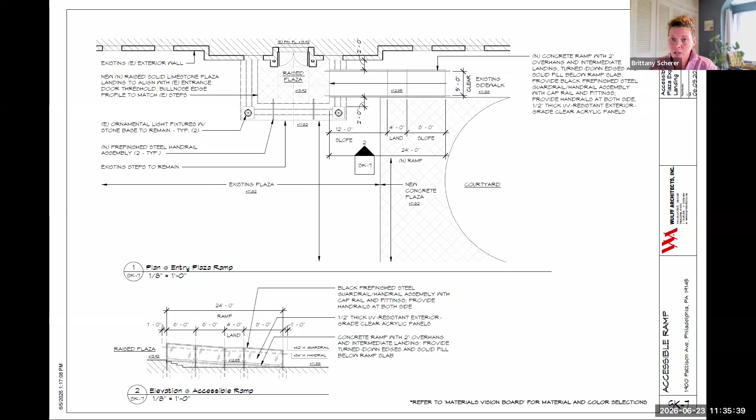I want to respond for Al, but I'm not sure if he's having some trouble with audio. We can look at the grade change in the length and verify that. The one piece I'll add in is that... oh, sorry Al, there you are. Would you like to chime in?

Sure, I'm back. John, the longer the ramp, and we're in favor of having that comply with code, of course, is that a lot of the people using this ramp are going to be coming over to the left. There are a lot of weddings held on the plaza, so we modified the curve of that courtyard so people could get to the bottom of the ramp. We want to comply with code, which would push that a little bit longer, but we don't want to make it too difficult to get up on that ramp.

Yeah, you're going to need at least another 4 feet, 5 feet. Yeah, I think you're right. I'm not sure why that's not drawn correctly, but we will extend that.

The other thing is we were concerned about the pickets being too busy. We did have a version that showed that solution, and it seemed like the simpler version was one that appealed to more people. Now, acrylics, we can replace that with some other material.

To your comment about needing to extend it further, and the path of where everyone's coming from being further to the left, I think you may need to explore this as a switchback ramp then. John, why do you see that? I mean, it's a simple ramp. I would think straight-on access would be acceptable.

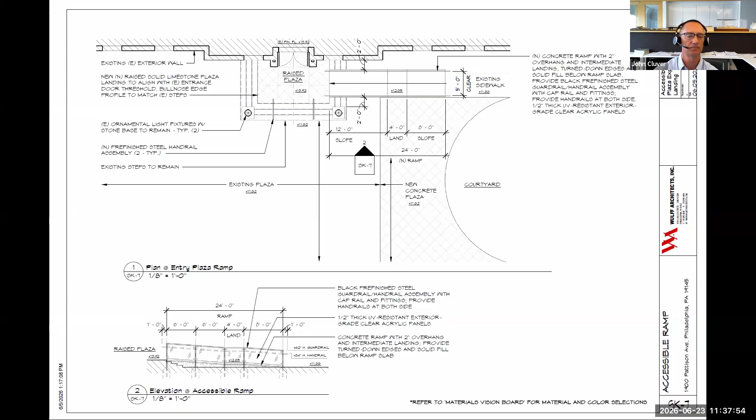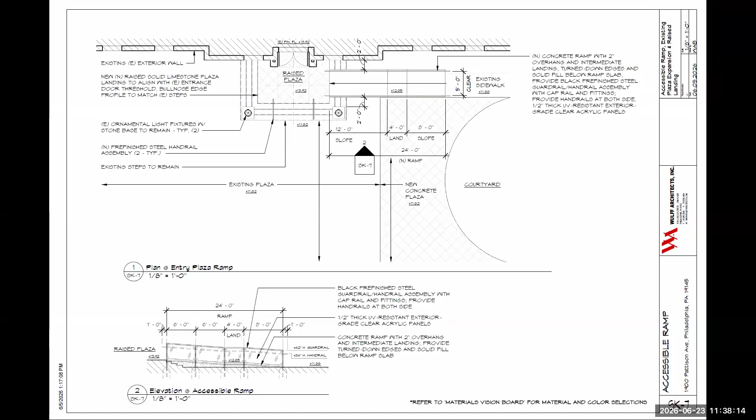Do we have other comments or questions from committee members? Could we talk about the lighting? Could they explain the lighting? I would be happy to do so.

And admittedly, we are very excited about the lighting. It's such a beautiful building, we're excited to shine some light on it—no pun intended, or pun intended, I suppose. Currently, there is facade lighting on the park side near the terrace.

On the Pattison Avenue side, the only existing lighting is an emergency egress light mounted to the building right next to the entrance on Pattison Avenue. So the project includes all new building facade lighting on the Pattison Avenue side to really highlight those architectural details. It includes replacement lighting on the park side so the quality and coverage is uniform on all sides of the building. We're also proposing new lighting on the east and west arcades.

That's reflected light that also provides lighting on those adjacent walkways and paths for the public. There is pedestrian-scale site lighting, like poles, through the plaza area and the parking lot for safety. And there is new lighting proposed on the existing sign on Pattison Avenue, the museum signage. There's lighting at the auxiliary building, and last but not least, we are replacing the light fixtures on the main cupola and adding new light fixtures on the two side cupolas.

So if you wouldn't mind moving to the next page, I think you can get a really good visual here. The intent is really to highlight the quality of the building and increase awareness and views, particularly from Pattison Avenue for visitors. Does that help provide enough information to answer any questions? Let me know.

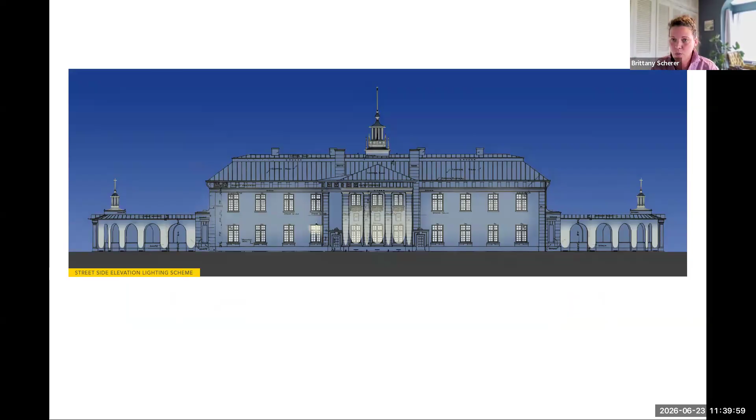What role is that light serving? It's illuminating a walkway that's not even the main walkway. That's a great question—that light will be in the soffit of the auxiliary building. As mentioned, the museum hosts quite a few weddings, and a third-party caterer uses the site frequently for staging, bussing dishes and things like that. So it provides a dedicated area for them with lighting and paving. Those lights could be switched off when not in use, which will make a big difference.

What lighting is mounted to the building, or is it all site and pole mounted? Looks like lighting type 2 might be mounted to the building facade. We tried really hard not to touch the building as much as possible. Both fixtures 1 and 2 are ground-mounted fixtures that provide a wash up the facade, and those same fixtures repeat along the arcade.

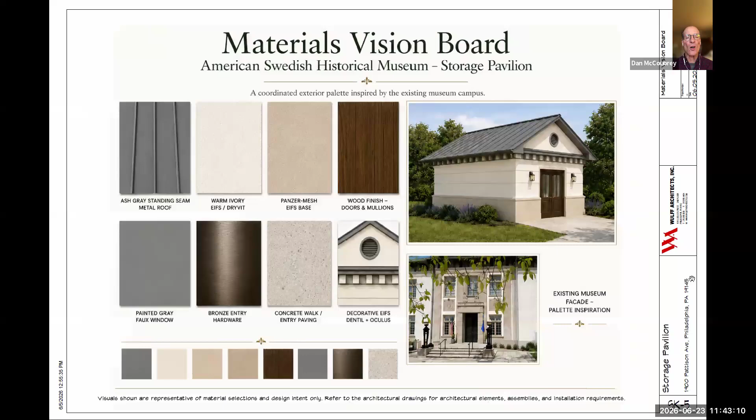Going back to the Pattison Avenue side for a minute—it mentions the stone veneer on the site walls there. What type of stone is that? We're proposing a quartzitic sandstone.

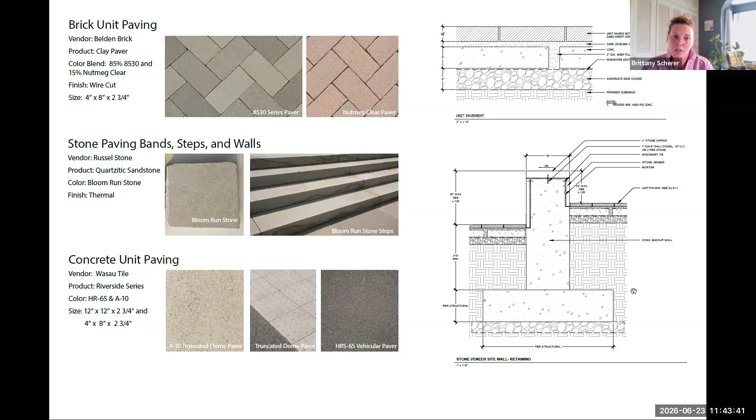The really beautiful steps on the park side of the museum are limestone, which is absolutely beautiful, but we find it can be very susceptible to water damage and freeze-thaw over time. So the quartzitic sandstone we're proposing is way less porous and much more durable, suitable for the freeze-thaw conditions we have here. We're proposing it for both the walls and the stairs, from Russel Stone Quarries—they supply quite a bit of stone throughout the city. So it's not a true match to the limestone on the other side, but we feel it's still in keeping with the Philadelphia vernacular and complements the building and architecture.

It looks like you've been able to get a pretty good match. Are your stair nosings 90-degree corners, or rounded like the existing site steps? We're planning a bit of a rounded edge for ease of visitors. Our intent is for the site work to feel sympathetic to the building and historic features without directly replicating, so we'll take inspiration from those stairs without directly replicating the nosings.

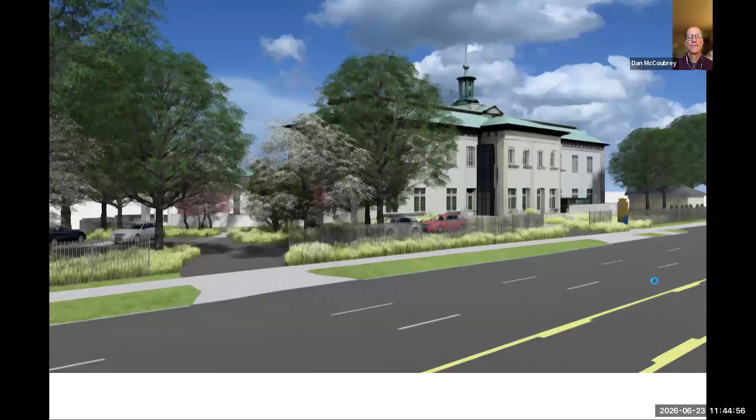All right, do we have other comments from committee members? Is there public comment? No hands are raised. All right, then who'd like to make a motion?

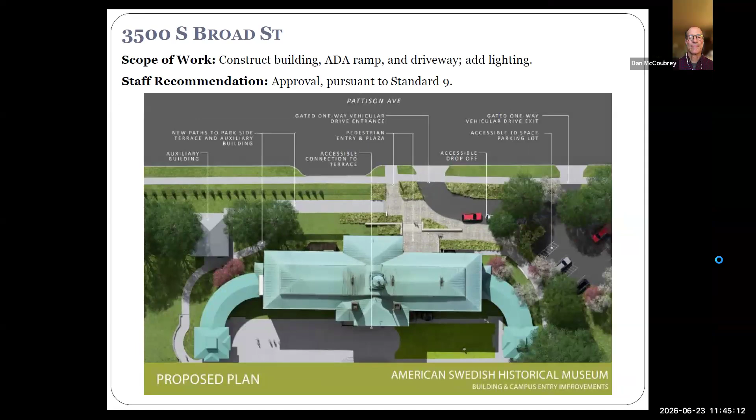I will attempt to make one. I think in general it's approval of the proposed additions to the project and the work, going with the staff recommendations in accordance with standard 9. I would request that the applicant look at the ramp and the use of acrylic panels, and also re-look at the location and design of the auxiliary building, to make sure it's in keeping with the design of the historic building that's 100 years old.

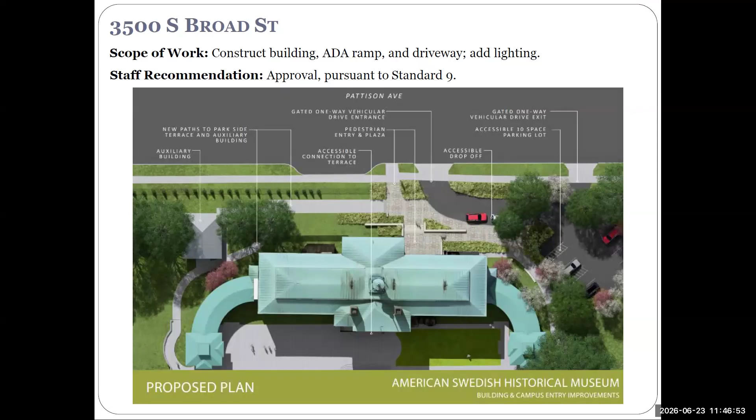I'm not quite sure what I'm voting on here—are we saying it's approved or not approved? I think what I'm saying is the auxiliary building as presented is not approved. Okay, and same thing with the ramp. And the same thing with the ramp. Okay, thank you for clarifying. But they can be approved with some tweaks, I guess.